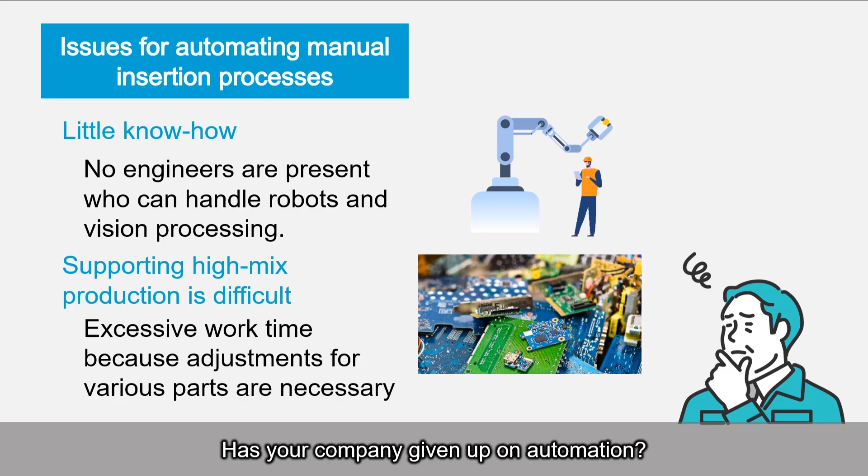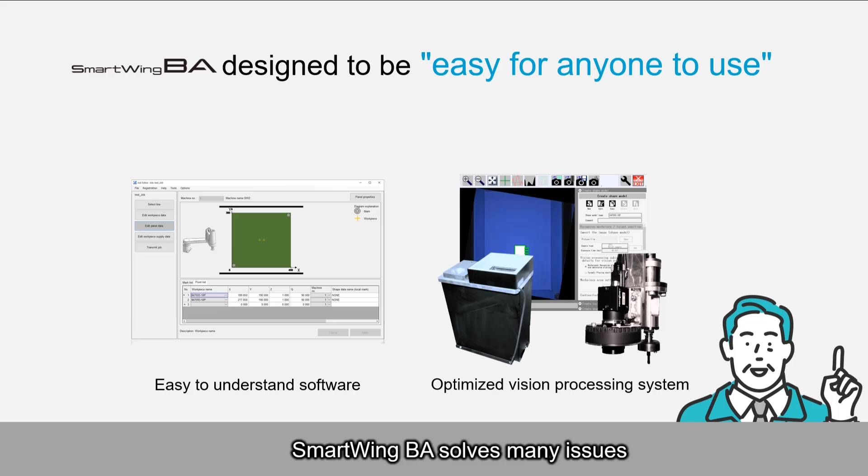Even though companies promote automation of insertion processes, many give up on automation because they find issues such as lack of know-how and trouble supporting high-mix production. SmartWing BA is designed to be easy for anyone to use, with easy-to-understand software and an optimized vision processing system that requires no expertise and setup takes little time.

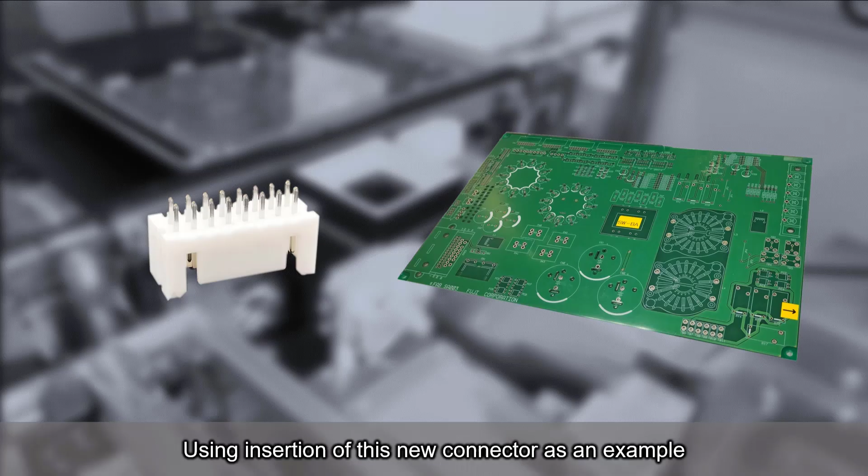In this video, we are using insertion of this new connector as an example. We will introduce the series for the setup method, including programming, creating shape data, and checking operation. First, let's start off with programming.

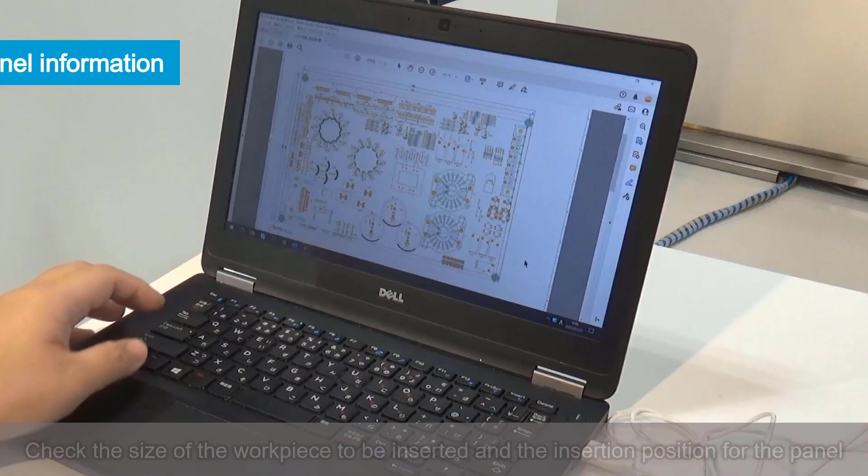This is the procedure for programming. First, we check drawing data and use calipers and other measuring instruments to check the size and position of the workpieces and panels. After confirming the sizes and positions, the job editor programming software is used to specify settings.

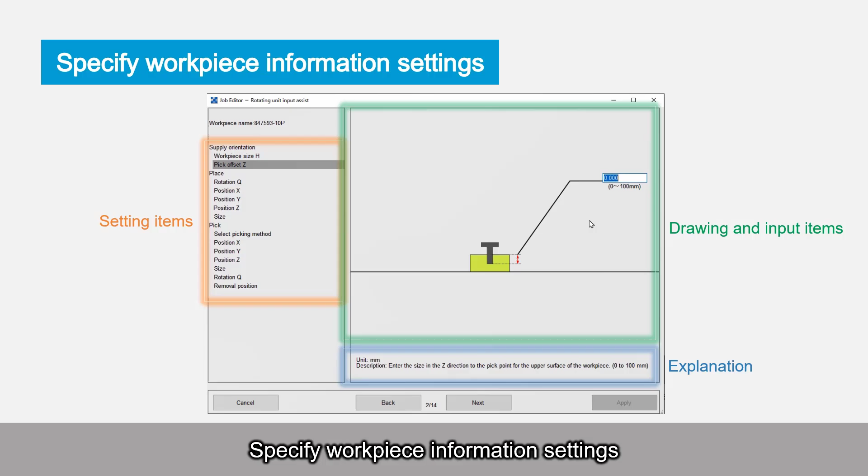First, specify the workpiece information settings. Drawings and explanations are displayed for the information, so check the contents when specifying settings. Next, specify settings for the panel size, insertion positions, and other panel information. When insertion positions are set, marks are displayed on the drawing so that the positions can be checked when entered.

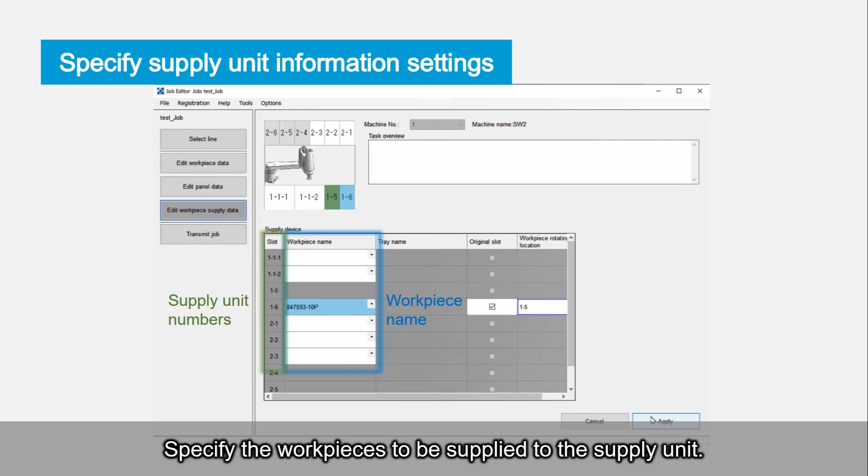Finally, specify the workpieces to be supplied to the supply unit. Send the job to the machine. Creating the job is completed.

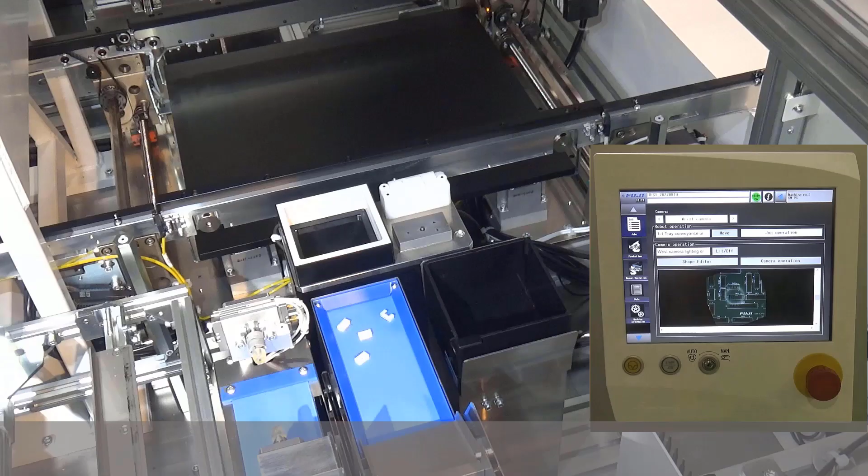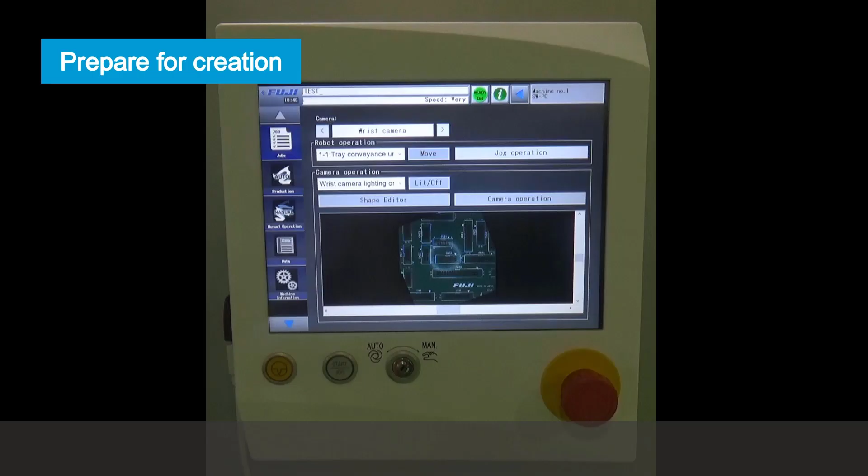Next, let's create shape data. This is the procedure for creating shape data. First, select the imaging position and move the wrist camera position to the imaging position. After moving into position, open Shape Editor.

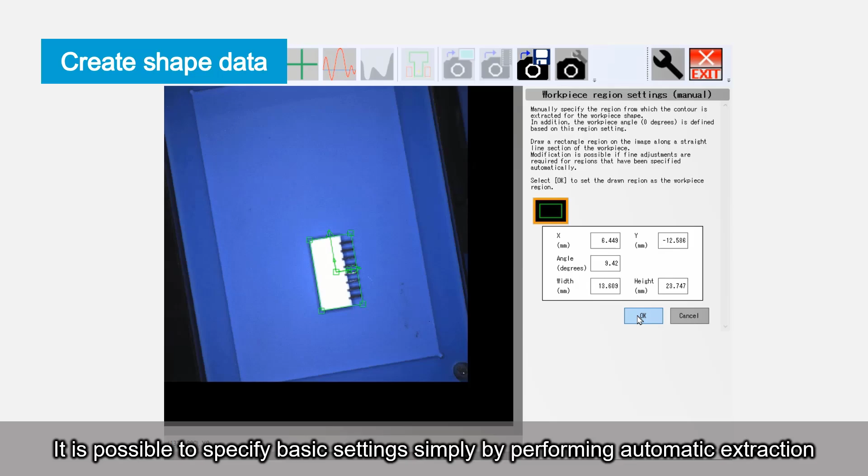In Shape Editor, it is possible to specify basic settings simply by enclosing the imaged workpiece in a square and performing automatic extraction. It is easy to create connector models by simply setting the number of pins.

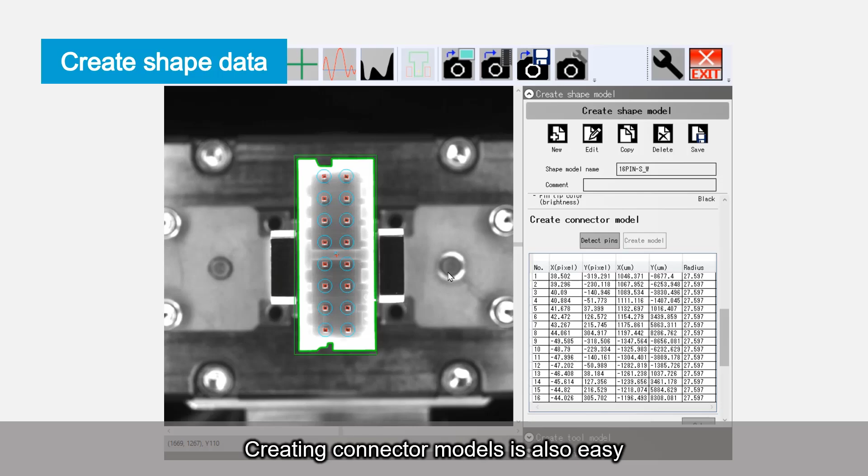After specifying settings, perform a search test. If no problems are found in the search test, creating shape data is completed.

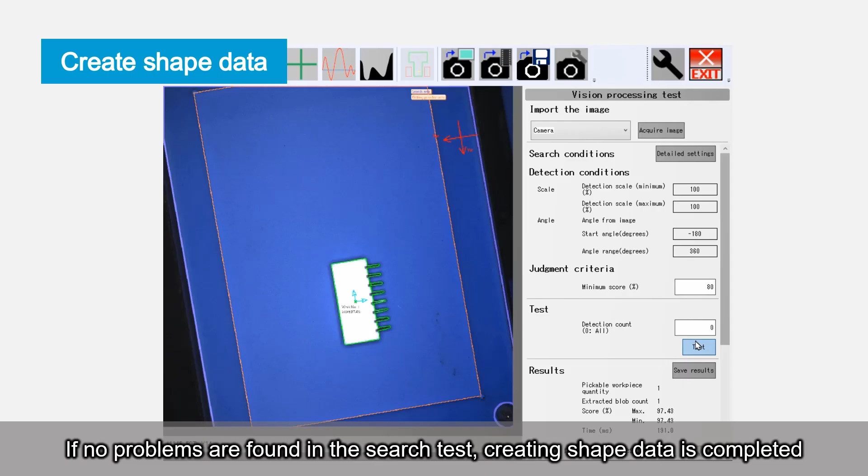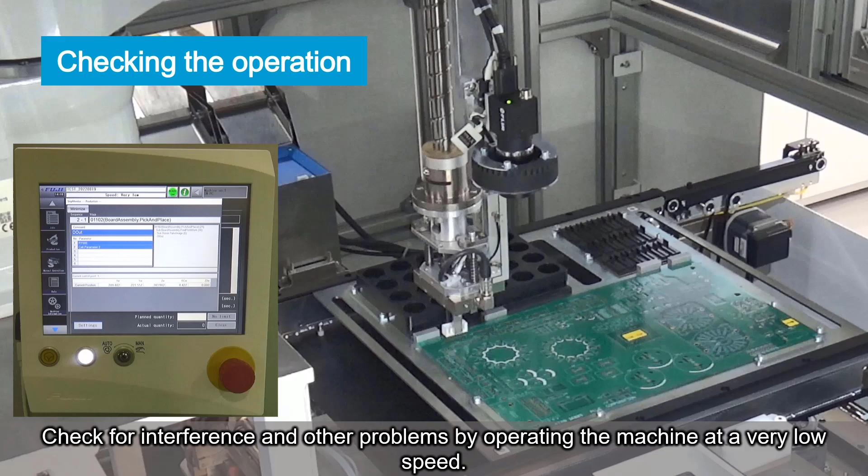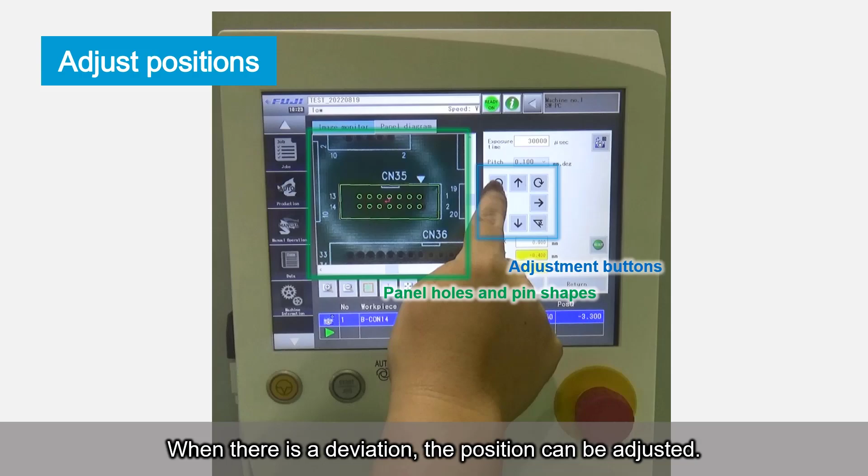Finally, check the operation. When checking the operation, check for interference and other problems by operating the machine at a very low speed. If deviations occur such as due to differences between the actual panel dimensions and coordinate data, the position can be adjusted. When production is confirmed to be performing smoothly as shown here, the procedure is completed.

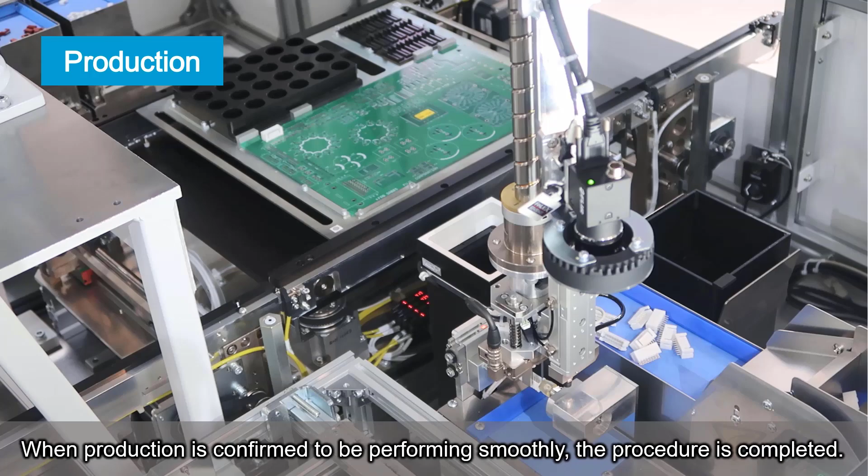As you have just witnessed, inserting workpieces into a panel with SmartWing BA is easy and takes just a few steps.